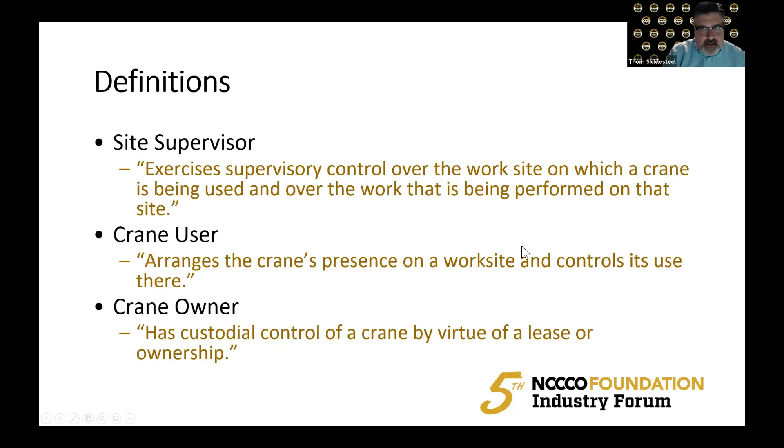So let's walk briefly through the site supervisor responsibilities, just to be clear on what they need to do. And so as we go through these, you'll note that some of these are listed in multiple places, and that's because there's multiple parties, multiple roles, multiple responsibilities that need to be coordinated. In some cases, and ASME says this clearly in its standard, one person can serve more than one of these roles. These are responsibility areas. These are not defining people. In some cases, they are split out amongst different people. In some cases, one person can do more than one role.

So I would just point out a couple of things on the site supervisor in the interest of time. The third bullet point, ensuring a qualified person is designated as the lift director. Under ASME, that is the site supervisor's responsibility. It's a direct tie from the planning of the work to the implementation of the work, directly tied back to the site supervisor. And that's a really important distinction to know. That's the only entity that is responsible for ensuring that the lift director is qualified and designated.

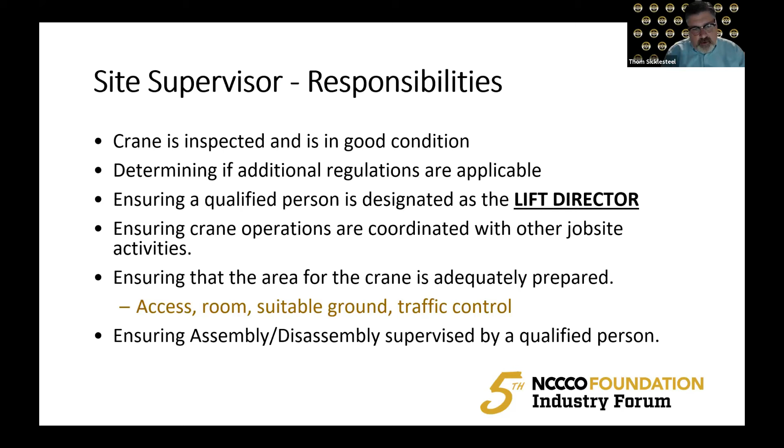I'd also point out that the site supervisor is responsible for the access room, suitable ground, traffic control, working with other crafts on the job site, other activities, who's going to get priority, as well as ensuring assembly disassembly is supervised by a qualified person. And so a lot of people don't think that a site supervisor would be responsible in any way for assembly disassembly. Again, this is the double check mechanism to ensure that it's done by a qualified person.

Site supervisor also is responsible to make sure that, again, setting up the rules. If we're going to work near power lines, are we going to have more restrictive guidelines? Are we going to implement the construction standard if we're in general industry? What kind of special lifting operations? What do we call a critical lift? What parameters is that? And that sort of thing. And at the very bottom, ensuring crane maintenance is performed.

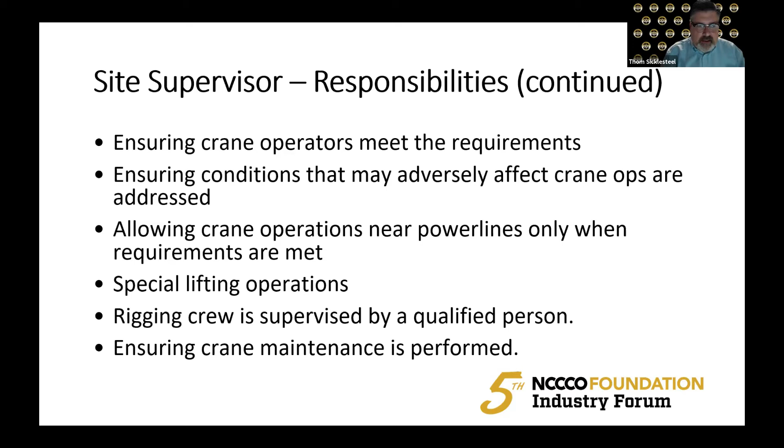So what report is coming through, what documents are coming through, needs to come through to the site supervisor. We'll move to the next one, the crane user. And again, I think this is really the gap in the industry: we all know who the crane owner is, and we know who the site supervisor is, and then we don't really address who is the crane user. And I think that if we address this as an industry, we would be a safer industry.

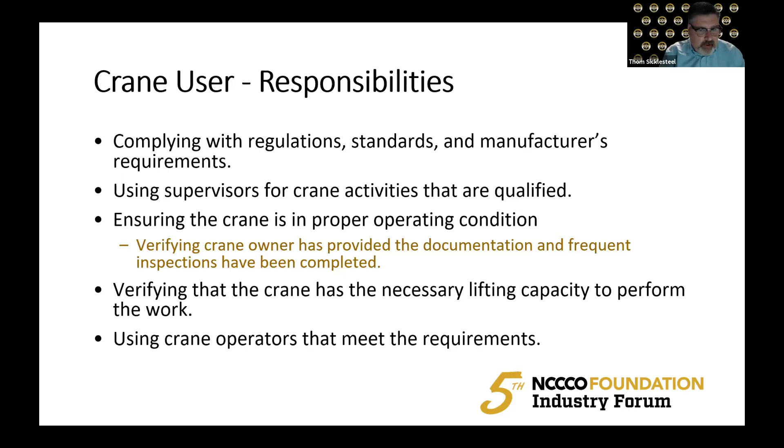The crane user is the one that arranges for the crane activities, makes sure that supervisors are qualified, and ensures that the crane is in proper operating condition. So this means: where's the documentation, have the inspections been completed, all of those kinds of things. This is a central part to understanding that the crane is ready to go, that the crane has the necessary lifting capacity, that the operators meet the requirements. On the next page,

there is also what happens if the operator, at the end of the shift inspection, says there's an adjustment or repair that needs to be done. The crane user is the one that helps communicate that to the next operator, especially in a multiple shift scenario. And you can see here, designating personnel for maintenance, repair, transport, assembly, and disassembly. So they're involved in the assembly and disassembly. And again, it's because they're controlling the use of the crane.

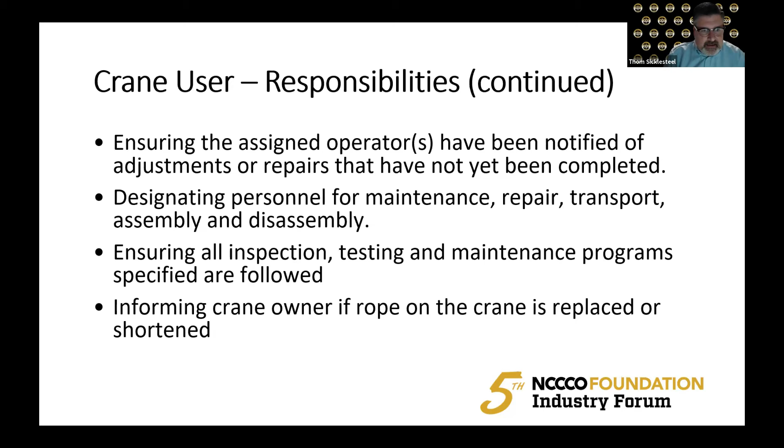Ensuring all inspection, testing, and maintenance programs specified are followed. So all of the inspection side, the testing, how we are going to do that, needs to come through the crane user. And informing the crane owner if the rope on the crane is replaced or shortened is an important element as well. So again, this crane user role, I think if we focused on it in the industry, would be really important to delegate as part of our contracts, as part of our processes on the front end.

The crane owner provides basically the information. They provide the crane that meets the standard set by who? The crane user. And so the crane user's role in that is really important, but the crane owner provides a crane that meets those requirements. They help provide information about components, technical information, and that sort of stuff. And they are also involved in the assembly and disassembly element. So you have site supervisor, crane user, and crane owner all involved in assembly and disassembly processes. This is important because each one has a different scope, a different part of the assembly and disassembly process.

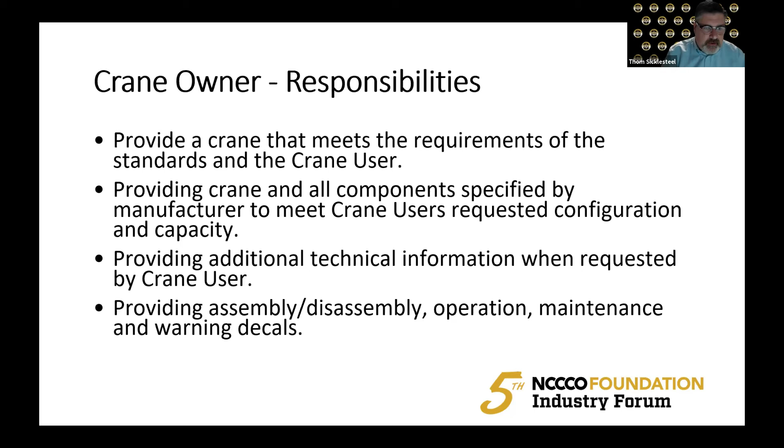Again, if you bare rent a crane, it's really important to know who you are going to go to for your technical information, because you will have to provide it at times. Who are you going to go to for the other information? It may not be the dealer. It may need to be the engineer of the manufacturer. It may need to be the safety department of the manufacturer that you go to for information instead of the dealer.

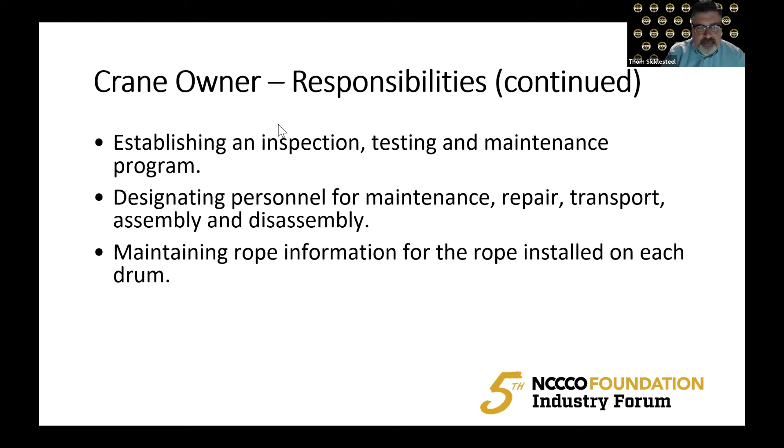Crane owner responsibilities also include establishing the inspection, testing, and maintenance program, and designating personnel for maintenance, repair, transport, and disassembly. So you see these interplaying amongst these different roles, and then maintaining the rope information. So that covers the three roles that don't really have any qualification requirements. Let's move into the other side of the coin.

So, lift director. The lift director has to be a qualified individual under ASME. There's been a change from the 2015 standard to 2018. In 2018, the lift director is required to be present at the job site. In 2015, there was a line in the standard that they had to look at each load, or make sure that the load was level and balanced. That role has now been moved to a rigger responsibility, and so the lift director no longer has that listed within its roles and responsibilities.

Many times I'm asked the question, isn't the crane operator the lift director? And the answer is typically no. Normally the person at the end of the hook, or around the load, or with the rigging crew and signal person, is the lift director. And it's due to this sentence: they can override the concerns and direct operations to continue.

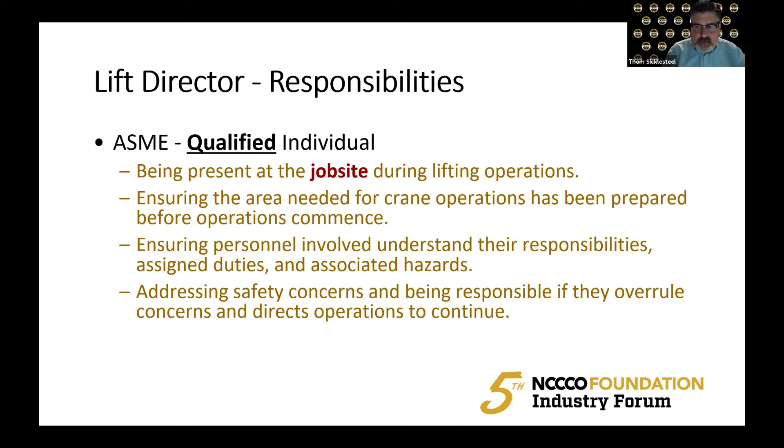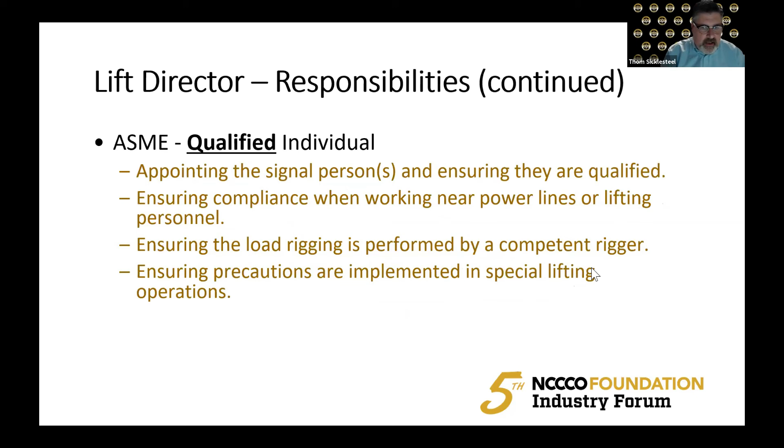Many times, the only situation where that's probably not the case is in a remote control situation where the operator is fully responsible for all elements of the lift. Lift director responsibilities also include appointing the signal person, ensuring they're qualified, and then implementing the plan that was set by site supervision about how they are going to implement work, and that relates to power lines, personnel, special lifting operations, or those sort of things.

So let's move on to the crane operator. Mr. Preston did a wonderful job explaining the qualifications that are required for a crane operator under OSHA. Under ASME, the requirement is that they're a qualified individual, so it's not as strict in ASME, but I think OSHA's done a phenomenal job with the responsiveness to the evaluation as well as the certification element and how that interplays. So crane operator responsibilities, I'll just bluntly say it this way. In the old days, they kind of thought crane operators were the captain of the ship.

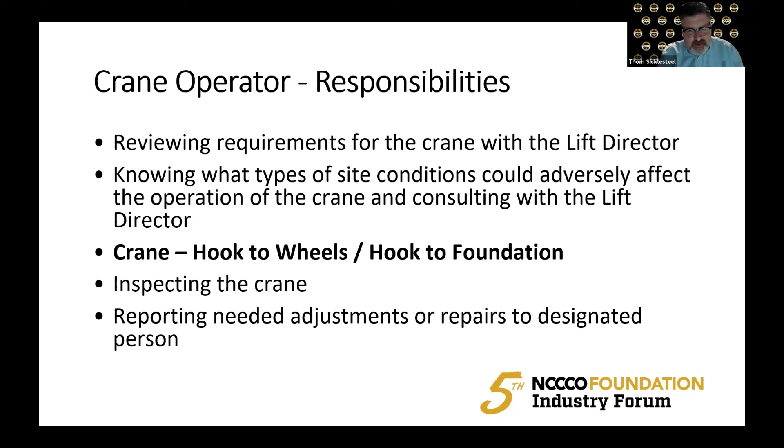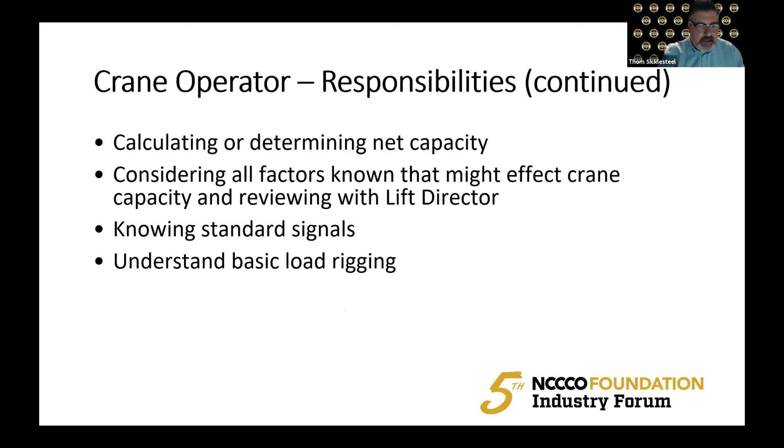The crane operator, in the way ASME's broken everything down, is truly responsible from the hook to the wheels, or in a tower crane, hook to the foundation. And that includes inspecting the crane, reporting adjustments, knowing the requirements, reviewing things with the lift director. They're the ones able to calculate net capacity and all other factors that might affect the crane. They're the ones the lift director can go to for crane-specific information. They also need to know standard hand signals and load rigging information.

Signal person: ASME says that needs to be a qualified person, and that's going to be revised for 2021, and there's going to be a whole bunch of responsibilities that are listed. It will still be a qualified person under ASME, but the details about how to qualify as an individual will be there under ASME, and the responsibilities will also be added.

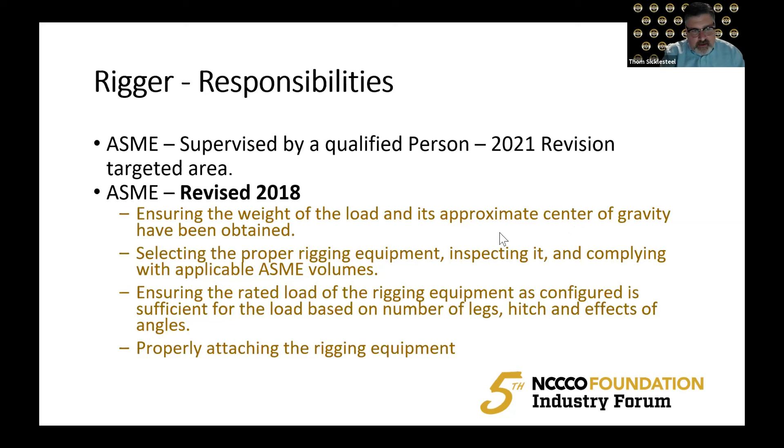Under rigger, rigger was added in 2018 as far as responsibilities. It was a targeted area for the qualifications of a rigger. So we'll see if that comes out in 2021. My teammate there, Stephanie Wood, will be able to speak more to that. But ASME did refine the responsibilities and define all of those for a rigger. That was added in 2018. And you can see that they understand the rigging equipment, how it's configured and properly placing it, center of gravity, making sure it's protected and balanced, and understanding signals, because when the signal person says raise a load, they need to understand what that means and how that may impact them.

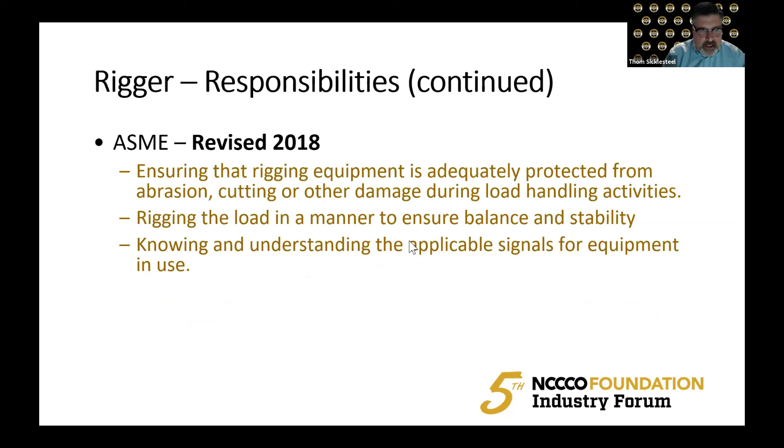The last one I'll go through is the assembly director. And for this, I'm switching mostly over to OSHA under the construction standard, because I think it's really a good baseline of what needs to happen. So initially, they'll hold an assembly meeting and that sort of thing. And then they can follow the manufacturer or employer procedures for assembly. In all cases, they would follow the manufacturer prohibitions, and then there's 12 specific hazards that they would need to mitigate, discuss, or address during their meetings. And at the conclusion of that, they would have a post-assembly inspection, and that's a central key element to say the crane has been properly assembled and ready to go for work.

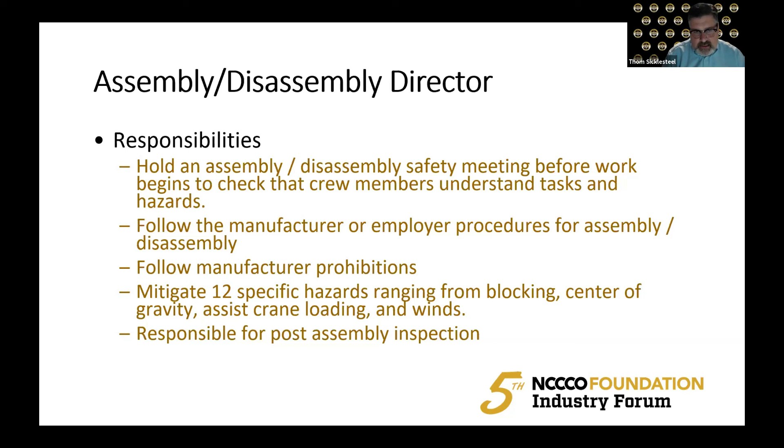So on the assembly director, one last thing: under OSHA, it's required to be a competent and qualified person. There are situations where you may have two individuals, one that serves as the competent person, which is the person that addresses the problems and issues, as well as a qualified individual. And the qualified individual might be a technician, an engineer, or those kinds of things. In all those cases, the competent person is the lead assembly director, and the qualified person is a support to that competent person for performing the activity. And so with that, Mr. Graham, I am completed with my portion.